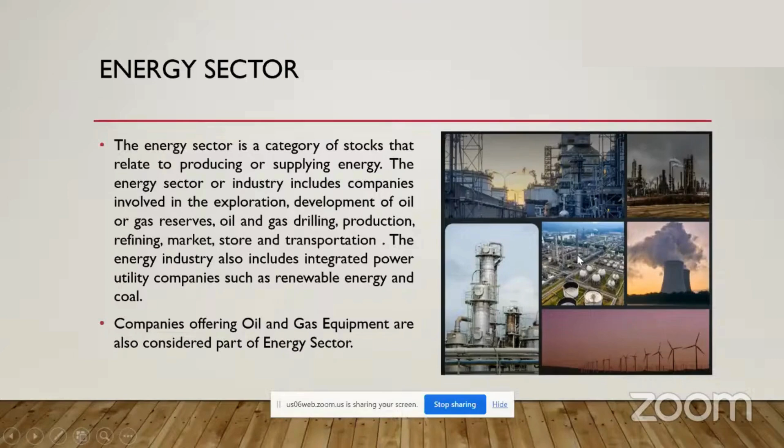Here you can see in the picture some refinery photos I have put, as well as some thermal power plants and the wind farm. So these are all here. You can classify the renewable and non-renewable resources. The wind farm also comes under the energy sectors.

What are the types of energy resources? I think these are the basic things we have studied from our school education. Once again I want to remind you all, these things we can classify as two: one is non-renewable energy, the other is renewable energy. Non-renewable energy, you all are already well known, and I have classified some examples of those resources: petroleum products, natural gas, gasoline, diesel, nuclear, coal. These are all the things.

From the renewable energy, you can say hydropower, biofuels such as ethanol. It is extracted from grasses or other wastages, bio wastages. From the wastages we can extract ethanol also, so it is also renewable energy. Then wind power, solar power, and hydroelectric. These are all the major classifications of energy resources.

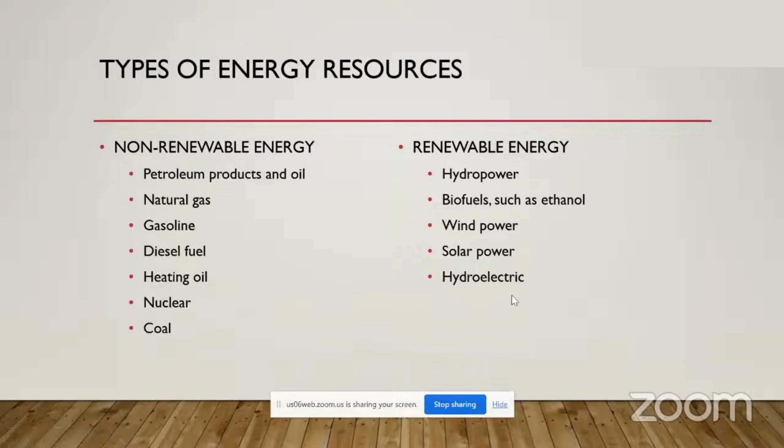Then who are all coming under that energy sector? As I have already described, once you identify the location of the resource, then we have to drill and do some exploration activities. That kind of activities are handled by some companies, and those companies are coming under energy sector. Once you extract the things from the underwater or underground level, it should be transported to another storage or nearby refining area, so for transportation and storing purposes we need pipeline and refining providers. Those companies are also coming under energy sector.

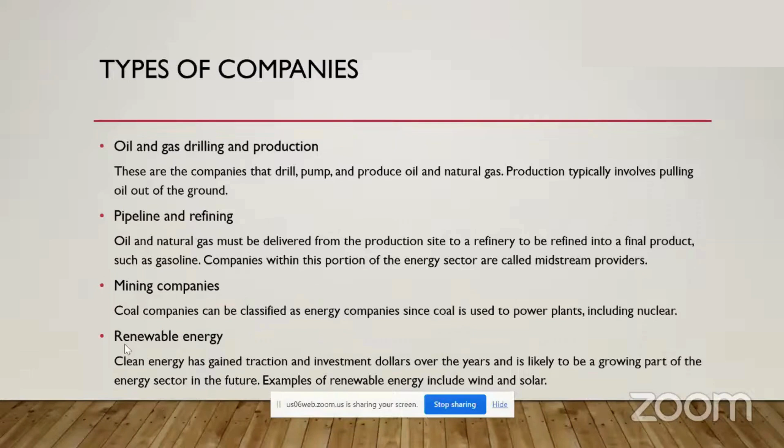Then the third one, the mining companies. Apart from oil and gas, you know coal was the best fuel in the last century. The coal mining operations are handled by some companies, and those companies are also coming under energy sector. From the past 20 years, our nation as well as world organizations are trying to invest huge investment to convert into renewable energy, so renewable energy also comes under the energy sector, for example wind power and solar power.

Now our motto is to give more detail about the oil and gas industry among those energy sector companies. So what is the oil and gas industry? Basically we know petrol and diesel, these are common terminologies we use daily in our life. So where is it getting extracted, or where is it getting from?

It's a huge activity with the involvement of multiple resources. They are working day and night to extract the crude oil from the resource areas. This oil and gas industry is also called the petroleum industry, and the whole global process is exploration, extraction, refining, and transportation, and it will be marketed to all the consumers like industries or households, who get the petroleum products from the marketing team.

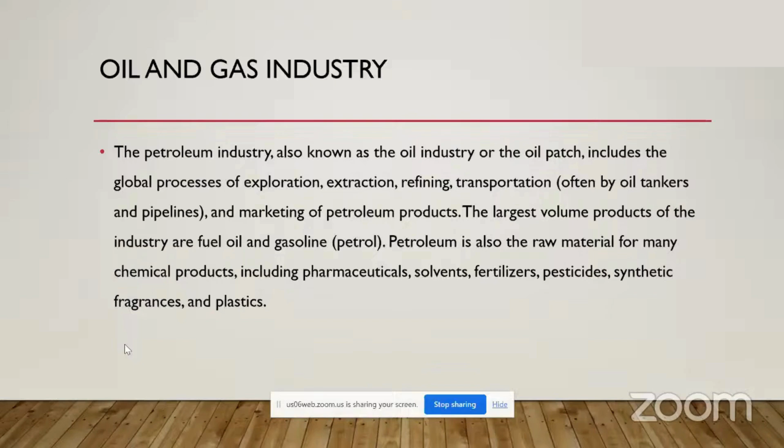The largest volume of product from the oil and gas industry extracted is gasoline and fuel oil. Petroleum is extracted from crude oil, and apart from that we are extracting hundreds of sub-byproducts also from the crude oil. Those byproducts are the raw materials for many other chemical plants, for example pharmaceuticals, fertilizer plants, pesticides. These are all prepared from the petroleum byproducts, which are the feedstock for those other major fertilizer and pharmaceutical plants.

Now, inside the oil and gas industry, I want to give the brief picture about three major components. The first major component is upstream, the second one is midstream, and the third one is downstream. So I want to give the clear picture about what is upstream, what is midstream, and what is downstream.

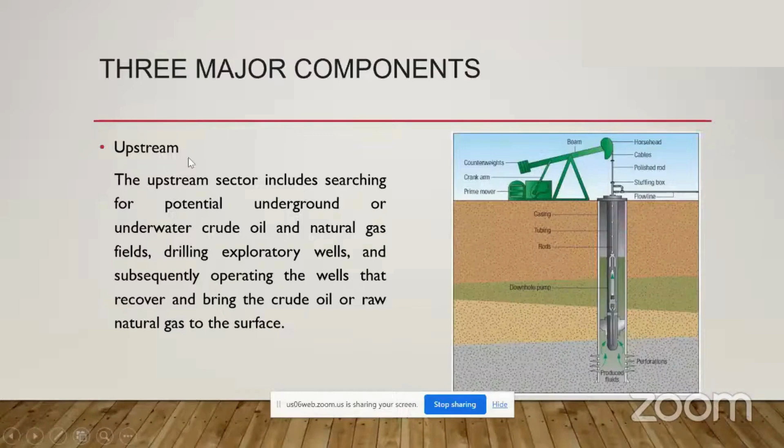The second one, midstream. So what is the second stage? After extracting the crude from underground to the surface level, you have already pumped the fluid to the ground level. Now we need to store that extracted crude oil. Then it should be pumped to the nearby refining unit, and the refined product should be transported to consumers like manufacturers or retail sales. Some of the fuels from the refined product, there are thousands of byproducts.

Once the excess quantity of extracted byproduct, the huge amount of extracted fluids will be stored, and again distributed for air fuel, some for home usages, some for industry usages, the major quantity for vehicle utilities. So these are all the major roles after extracting the crude oil.

Except for this refining part, once you extract the crude oil from the ground level, it should be stored somewhere as a crude stage. Then it's pumped up to the refinery for the refining process. This refining process is called downstream. But from the ground level to storage, and from storage up to the refining area, these pipeline transportation networks are called midstream.

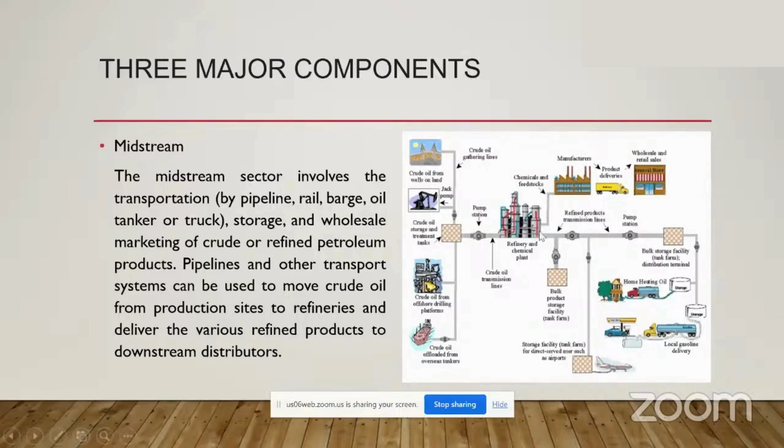Again, once you refine the petroleum products, the pipeline and other transport systems can be used to move the crude oil byproducts to different consumers. Those piping networks also come under midstream activity.

Now the third one, downstream. Downstream is exactly once you get the crude oil from the surface level, you store it somewhere, and it's transported through multiple mediums to get to the refining stage. So the pipelines are routed till the refinery. In the refinery, with the number of equipments, the major process is crude oil processing.

Once the refined product is from the crude oil, we refine it and produce a large number of petroleum byproducts. Those activities, that refining activity, happen in the refineries and petrochemical plants. So these all come under downstream.

Once you get the byproduct from the refinery, in some cases based on the location, it will be directly routed to the nearby consumers. Like if we have a refinery in the Gujarat area, within 200 to 300 kilometers we can make direct transportation of that fluid, meaning petroleum products. So those areas also come under this.

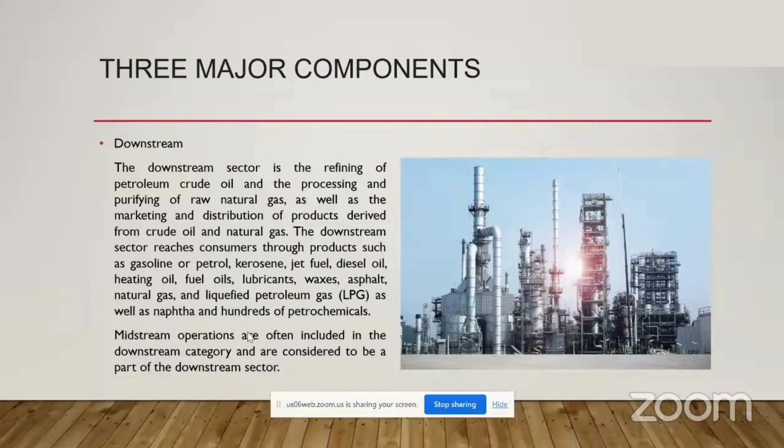So now I have explained about what is upstream, what is midstream, and what is downstream in the oil and gas industries. Now, what is crude oil?

First, crude oil is extracted from underground. So how does it look? It's a black liquid; in some cases, some brownish black also.

So the crude oil is a black liquid found in geological formations. It is a fossil fuel. The terminology fossil refers to the formation of the fuel from dead organisms that are buried under intense heat and pressure, getting it from underground, and in some cases under the seawater level also.

So the crude oil is the black liquid, and it is obtained from geological formations.

Now, there are three primary qualities for crude oil to define the category, because there are different qualities of crude oil available from different origins around the world. North America produces oils, South America's oils also there, the Gulf countries also producing oil and gas, even in India we have some exploration wells. So how can we categorize the crude oil quality?

To define the quality there are three primary parameters. The first is weight of the crude oil, the second is sweetness of the crude oil, the third is TAN count. Based on these primary qualities we can categorize the crude oil.

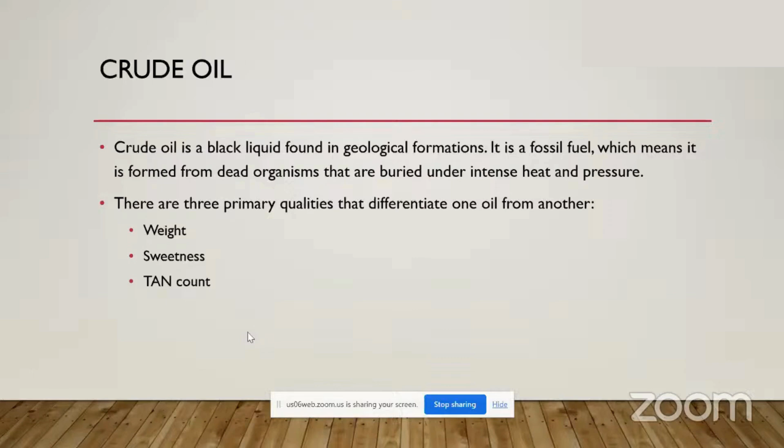First we can see about weight. What is weight in crude oil? Based on the weight we can categorize it into two: heavy and light crude oil. So what is heavy crude oil and what is light crude oil?

Heavy crude oil has higher density, so it evaporates slowly. The extraction of byproducts from heavy crude oil is a little difficult and a more complex process. So the major heavy products are like asphalt. You know, asphalt for road paving and everything, we are using asphalt, right? So heavy oil majorly produces asphalt; some kind of gas extraction happens too, but the major byproduct is asphalt from heavy oil.

Now, light oil. What is light oil? It's a less dense oil. From light oil we can easily extract a greater percentage of gasoline and diesel compared to heavy oil, because from light oil only we can easily extract useful byproducts as fuel.

In light oil, the density is less, so the evaporation quality is also high. We can extract a greater volume of gas from light oil also. Even 95 percent of fuel from light oil can be directly converted into direct fuels. Only 5 percent will be other petrochemical byproducts, but from heavy oil it can't be, it depends on the quality.

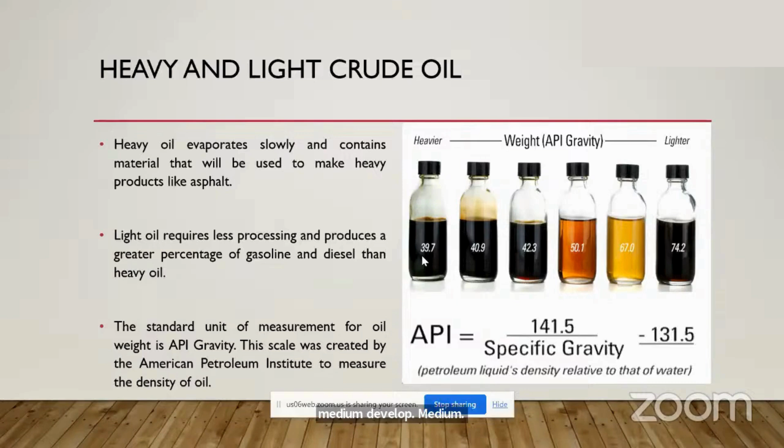The first part is weight, which we have already seen. According to the weight, there are two major sectors: one is heavy and the other is light. Now we are going to see about the sweetness of crude oil.

What is sweetness or sour? It's based on the sulfur content incorporated, meaning participated, in the particular crude oil. Based on the quantity of sulfur inside the crude oil, that will determine whether that particular fluid is sour or sweet. If the percentage of sulfur content in the crude oil is less than 1%, then it will be considered sweet oil.

If it is 1% or more, in the range of 1 to 2%, then it will be considered a high sulfur level, so it is considered a sour crude.

If it is sour, what do we need to do? Once a crude is identified as sour oil, then it will be stored with more protective storage vessels till the crude goes into the refineries. First it gets into the refinery, and the first thing will be the process of removal of sulfur content in the crude oil.

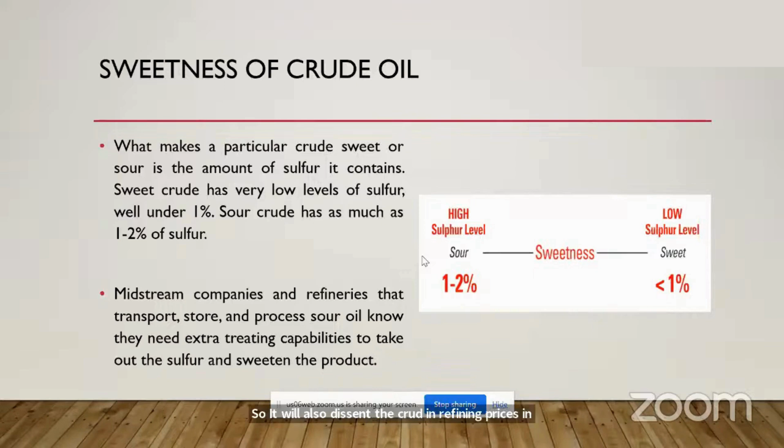The third quality is TAN count. What is TAN? Total Acid Number. The TAN stands for total acid number, and it will decide whether the extracted crude is more corrosive or not. This is the major thing.

If it is more corrosive, then we need to give additional protection to the equipment and pipelines, wherever the crude is transferred. Those kinds of additional protection and precautions are needed in the metallurgical selection.

So how do we measure the TAN count? Here I have put some examples for you: if the count is 0.01 milligram of potassium hydroxide per gram, versus 3 milligram of potassium hydroxide per gram.

If the value is 0.01 milligram, then it will be very low corrosive. If it is in the range of above 1 to 3, then it requires more protective metallurgy selection, because the acid count is high, so it will easily corrode the pipelines or equipment wherever the crude oil is transferred.

So what information does this unit give us? Milligram of potassium hydroxide per gram. Once you identify the crude oil has an acidic nature, we need to neutralize it. To neutralize that crude oil, we need to add some potassium hydroxide to it.

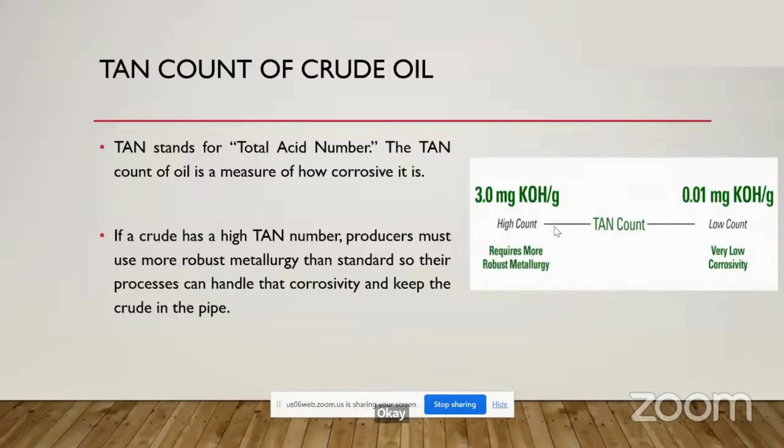Then the third one is crude oil processing. Once you transfer the crude from the surface level, through storage areas and pipelines, it gets into the refinery area. The exact number of operations is not fixed and depends on the crude characteristics, but these are the basic things seen in every refinery. Once the crude oil comes from the storage area, it is routed to the boiler. Once heated, it goes to the vacuum distillation column or the atmospheric distillation column. Based on the boiling point of the fluid, multiple byproducts are extracted at different boiling levels.

At 20 degrees you can see gas is extracted, around 40 to 70 degrees naphtha, and around 120 degrees gasoline. These are the different boiling points, and based on them the byproducts are extracted from the distillation column. The carbon count for each byproduct is listed in the image: for gas it's 4, for naphtha it's 8, for gasoline it's 8, for kerosene it's 12, for diesel it's 16, for lubricating oils it's 36, for heavy gas oil it's 44, and for some residuals it may be 80.

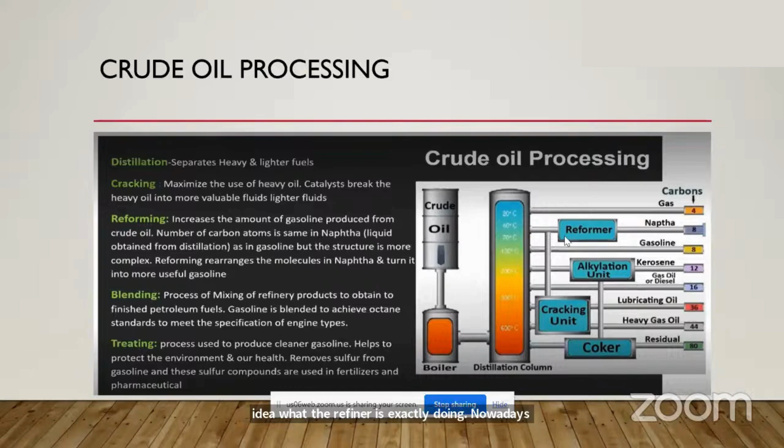These are all the major overview of crude oil processing. If you want to learn more, you can just Google it. You will get the exact idea of what refineries are doing nowadays in crude oil processing - there are more technologies involved.

Then the difference between the refinery and the petrochemical plant. In the refinery, we get crude oil as input, so the feedstock of the refinery is crude oil. It then gets refined through reforming and cracking - multiple operations happen inside the refinery, and we majorly develop byproducts.

Those byproducts may be gasoline, naphtha, diesel, jet fuel, asphalt - hundreds of byproducts are extracted from refineries. So the major difference between the refinery and the petrochemical plant is that the feedstock of the refinery is crude oil, and it develops petrochemical byproducts.

A lot of gasoline, fuel, and some other chemical substances are also extracted from the refineries. In the petrochemical plant, we are getting the byproduct of the refinery as a raw material input feedstock. That petrochemical byproduct goes into multiple types of products, for example polymer production meaning plastics, dyes, detergents, and fertilizers. Many products are developed by using petroleum byproducts.

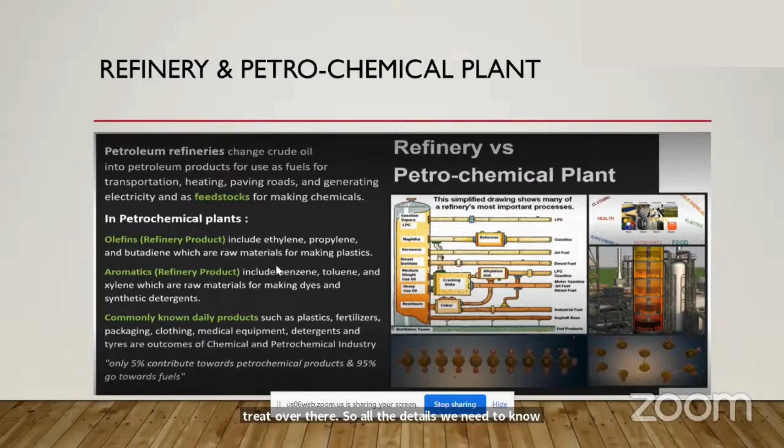So these are all the things. First of all, I wanted to convey to you an overview of what is oil and gas, what is the energy sector, what is crude oil, and how we are going to treat it. We need to know all these details. Then only we can find out how the piping engineer is going to support us for the extraction of petroleum products. So what is piping here?

Piping is a system used to convey fluids. It may be liquid or gas, moving from one location to another location. This is the basic idea of pipes, which is something everyone knows.

Then why does this engineering require a lot of engineering manpower to develop piping engineering? The major mode of piping design is to get an efficient transportation method. Anyone can build a pipe, anyone can give a pipe, but piping is not only about 100% engineering — it needs some imagination power also. How can we route it efficiently? How can we save piping materials, how can we reduce project cost? These are all things that come under a piping engineer while working in the piping discipline. So piping is just a conveying medium to get fluid from one location to another in an efficient way.

So what is the role of a piping engineer? We can categorize it into two major activities. The first activity is the location of the equipment in the layout, in the plant. The second one is the interconnection between the equipments by using piping. So these are the two major things: one is equipment layout, and the second is piping design. Why are these two things important for a piping engineer?

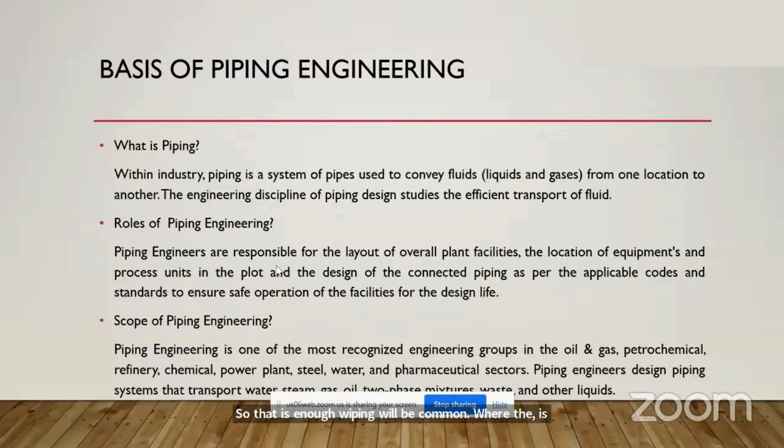As I have already told you, the major activities in piping are equipment and development of equipment layout, as well as piping design. So the major considerations we need to keep in mind: one is access. The equipment should be accessible by everyone. The second one is the removal space.

If you want to remove things, meaning the removal space, if you want to take the equipment for maintenance or replace something in the equipment, the removal space should also be there. Otherwise, if you locate all the equipment too close together in a congested way, since equipment can be huge in size, you cannot place cranes over there. You have to give some ways for the movement of cranes, fire engines, and other major vehicles to access the equipment.

Then the cleaning area - yearly cleaning or every 2 years, scheduled based on process requirement and project requirement. For the cleaning activities we need to give some provisions over there.

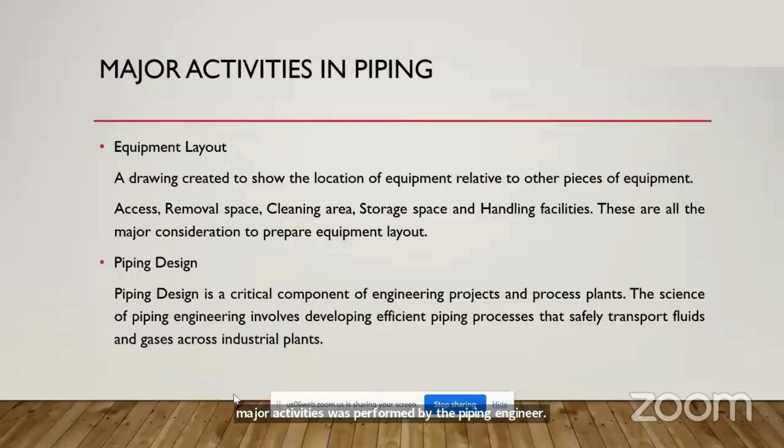One is equipment layout, the other is piping design. To prepare the equipment layout, what are the major inputs we need from other disciplines or teams? To prepare the equipment layout, first of all we need the process flow diagram.

From the process flow diagram you will get the major details of the equipment - what are the major equipments over there, and what is the major pipeline or piping, what is the size of that piping. These details you can come to know from the process flow diagram.

Then the P&ID, piping and instrumentation diagram. Here you will get all the equipment details in detail, as well as the major process piping and utilities and other process pipings, the number of valves over there, the size of the valves, the number of instruments, number of connections, number of drain points, number of vent points - all the details you can get from the P&ID.

Then the project design basis. In that, the facility background - where we are going to exactly place these equipments. So the surface level, the weather conditions, the soil conditions, all the details are available in the project design basis.

Then the geographic location and topographic details. Geographic and topography are the major things while considering the equipment layout, because based on the soil condition and the waterways only, you can determine where we need to place the equipment inside the plant.